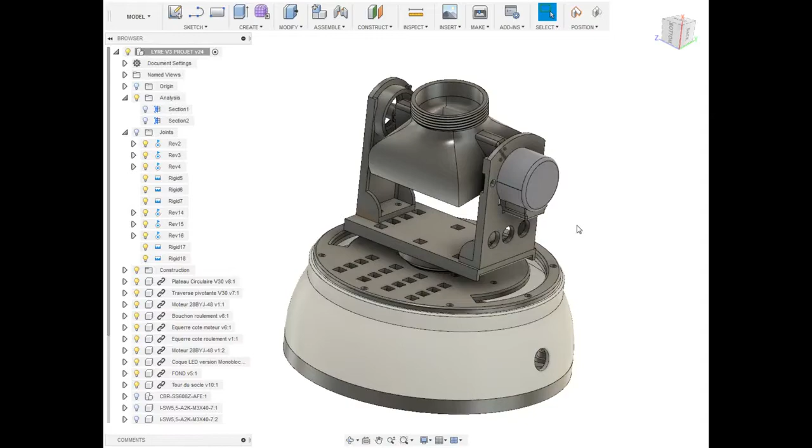I do recommend this software because it is designed by Autodesk and they distribute a personal license. They call this license the startup license. So that's a good thing because it's legal and free.

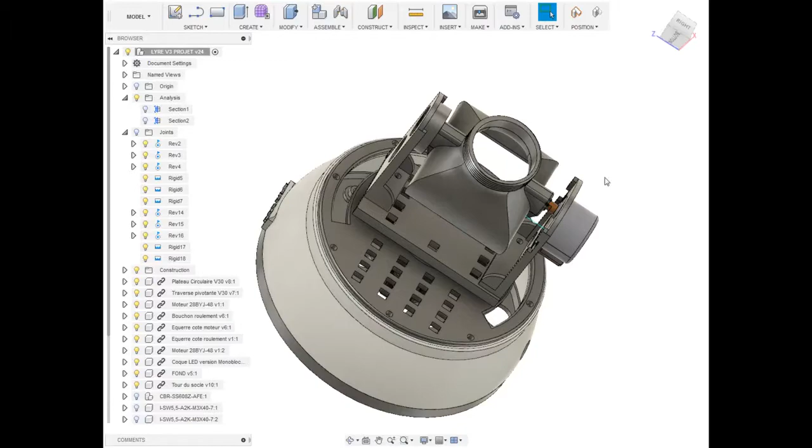That being said, here's an overview of the moving head. At the moment you cannot see the electronic parts inside. Electronic parts are not shown at the moment, neither the LED nor the heatsink. I'm currently working on an upgraded version. So in this video I'm gonna explain how it was designed and how it works.

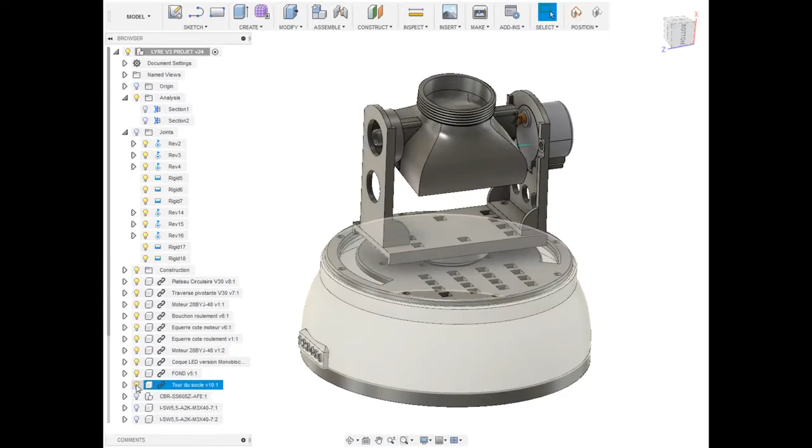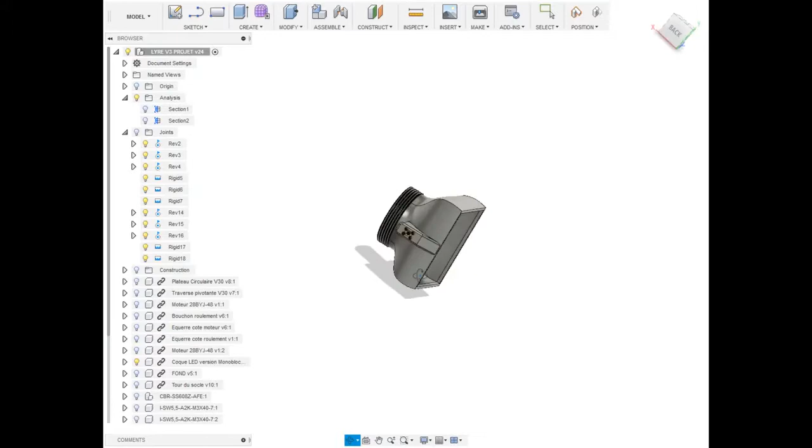So at first we're gonna start with the main part, which for me is this one. This part was designed to hold the LED and the heatsink. The heatsink I've chosen is a kind of processor heatsink, so it's a square shape, and the LED will be screwed on this heatsink. The LED emits its light, which of course is going through this hole.

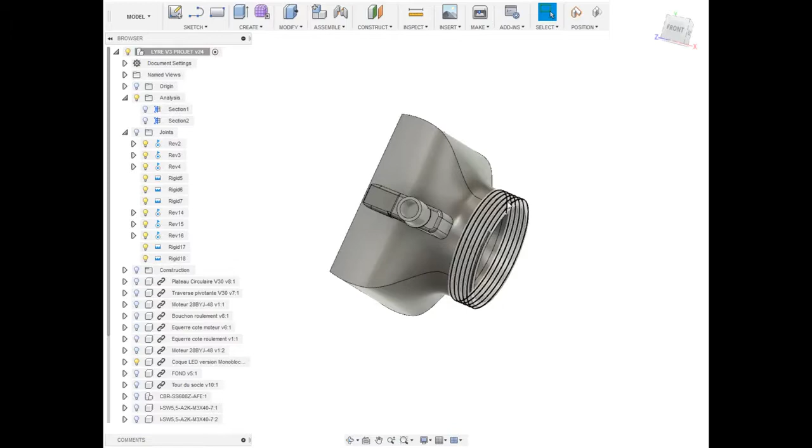And on this new revision I've added a thread here. The purpose of this thread is to allow using a lens holder, and by screwing and unscrewing, to adjust the distance between the LED and the lens. It's a very common design. This will allow adjusting the beam to make it more narrow or wider. This will also have an impact on the mix of the colors from the LED.

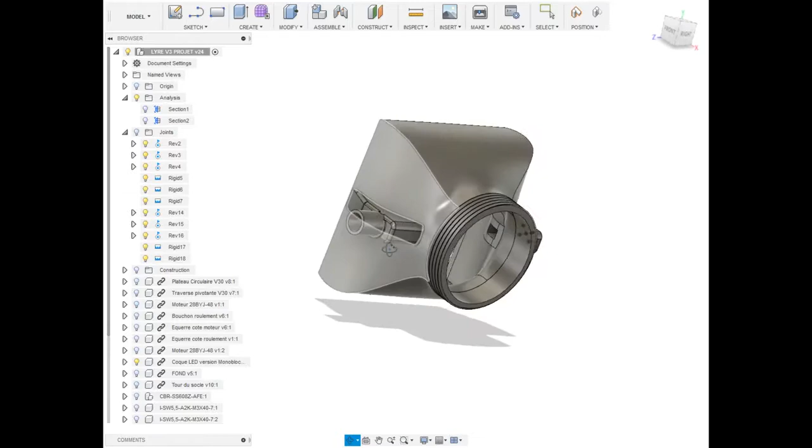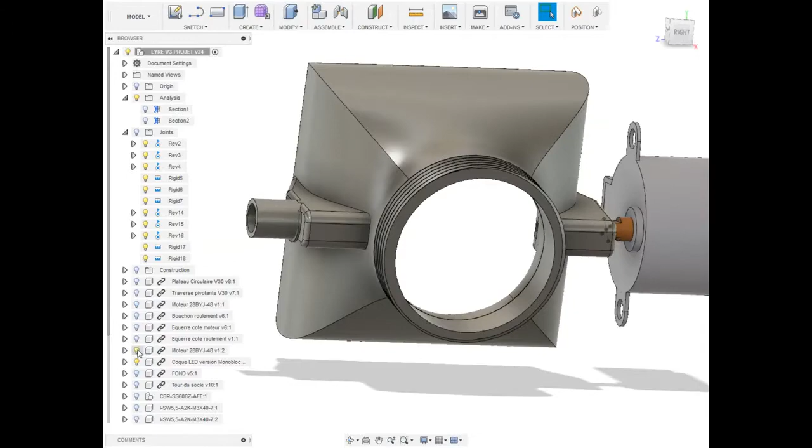On the left side you can see an axis here. On this left part you can see a cylinder shape, whose purpose is to fit inside the inner part of the bearing. This will allow creating a pivot link. And on the right side here we have a kind of rectangular shape to fit the motor axis in. So now let's talk about the motor.

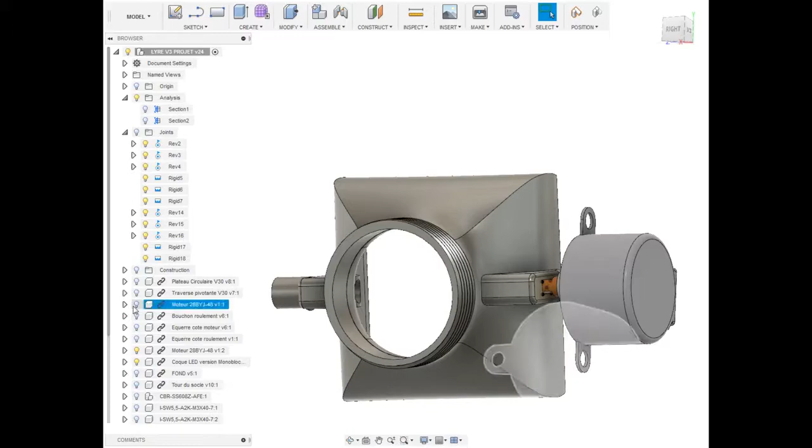The shape of the motor axis is kind of rectangular, and as you can understand, of course, the motor is used to actuate the pivot of the LED on one of the axes. So now I will show the bearing here. So now here you have a motor holder which allows attaching the motor to the chassis.

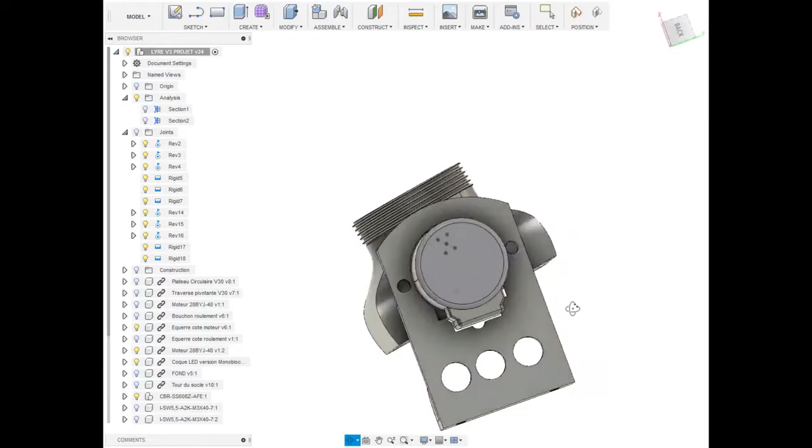And on the other side it's quite the same. This part is here to hold the bearing. The bearing is inserted by force, and that's a nice way to hold it. You don't need to glue it.

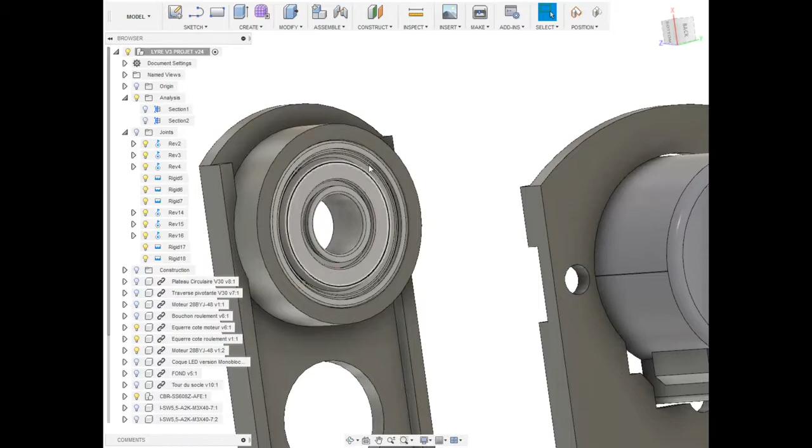So now here we have a heatsink and LED holder and everything that's required to move on one of the axes. We have this motor and this bearing, and now we're gonna place all of that on a kind of plate. But just prior to this, as you can see, there's a hole which is here to allow the wires coming from the LED to go outside of the casing.

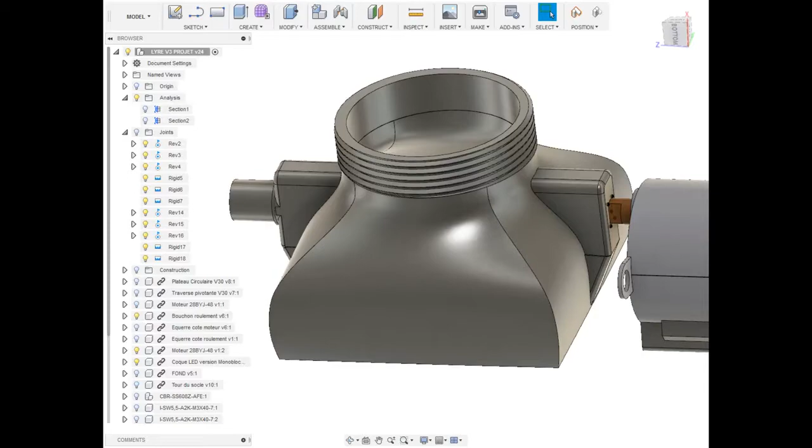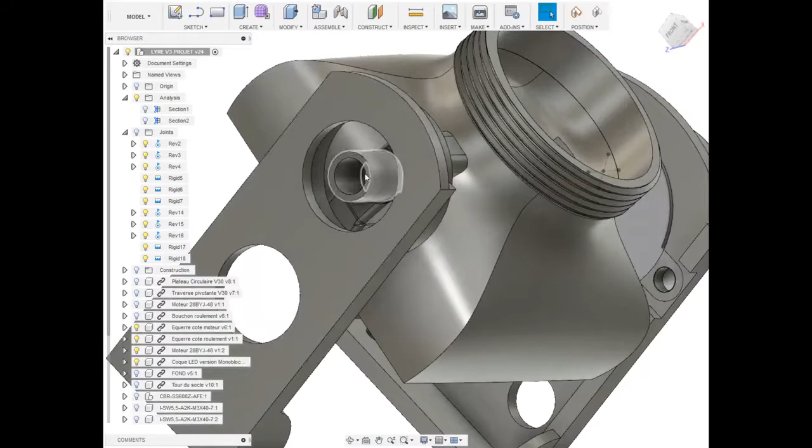The LED is RGBW, so it's a 4-color LED. So that's kind of a quadruple LED, which means we will need 8 wires from this LED to the electronics. The wires will turn as you move the LED on this axis. So of course, as you can imagine, there is no infinite rotation available on this moving head.

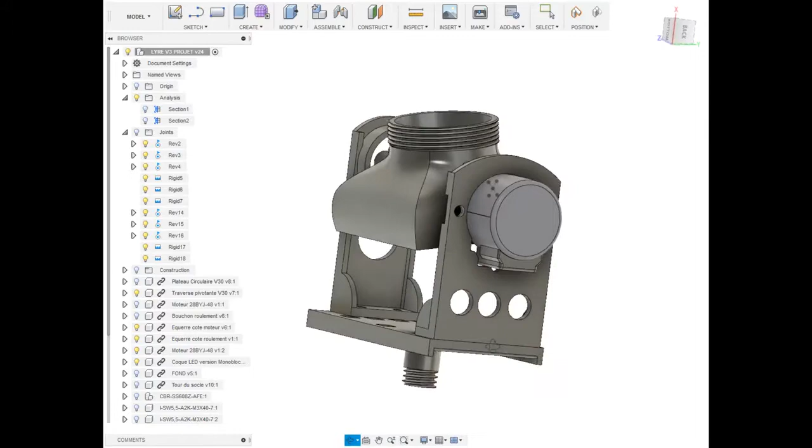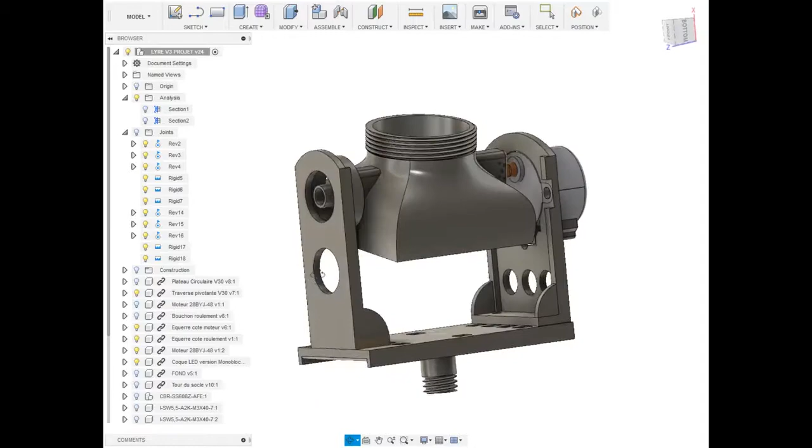So here we have an extra part to make this whole subset rigid. And as you can see, this extra part has an axis to allow rotation on the second axis of the moving head. This one is called the pan axis. The first one we've seen is the tilt axis. So the purpose of this part is to have a rotation like this.

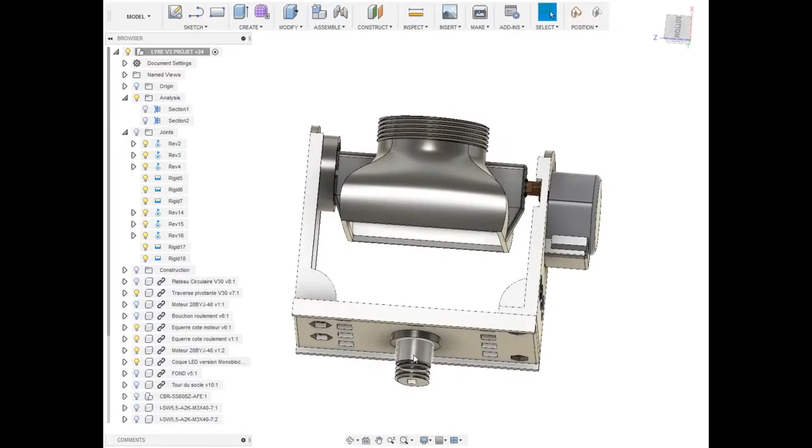We're going to use the same principle for the rotation as for the first one. We're going to use a bearing. Still the same, this part will fit in the inner ring of the bearing and ensure a proper rotation. I will hide a few parts so that we can see it better. This bearing will be located here, and as you can observe, there is a thread.

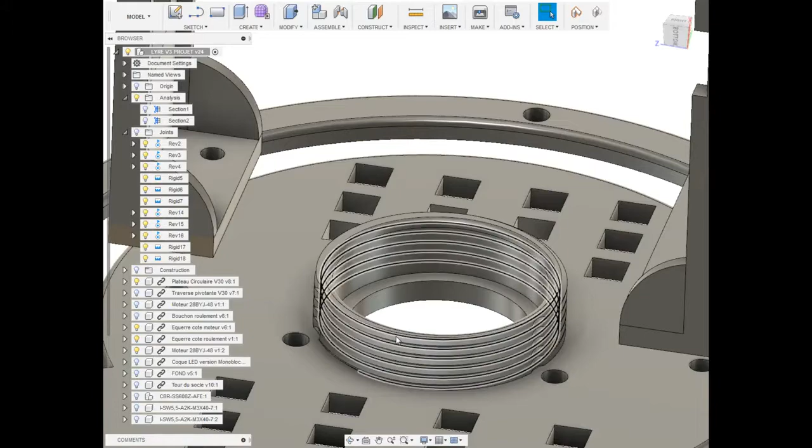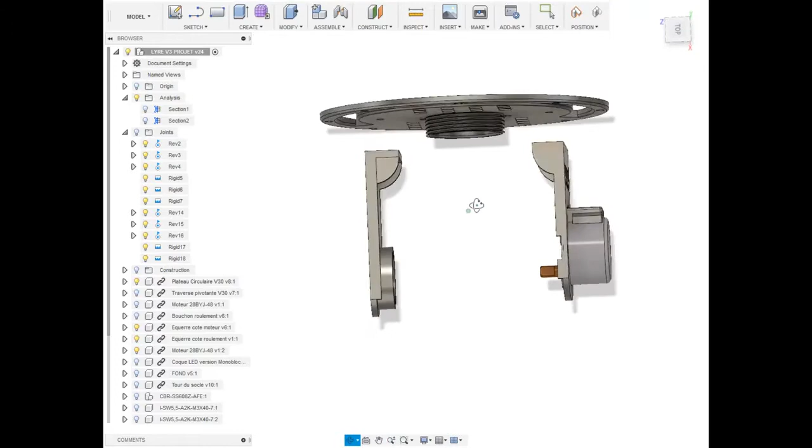This thread will be used to receive a kind of cap which will hold the bearing in place. And this way, even if you use the moving head upside down, this bearing will ensure that the first axis will not fall to the floor. So it's quite important, because I like when moving heads are oriented upside down like this. I prefer this orientation. So as you understand, this is where this thread is very important.

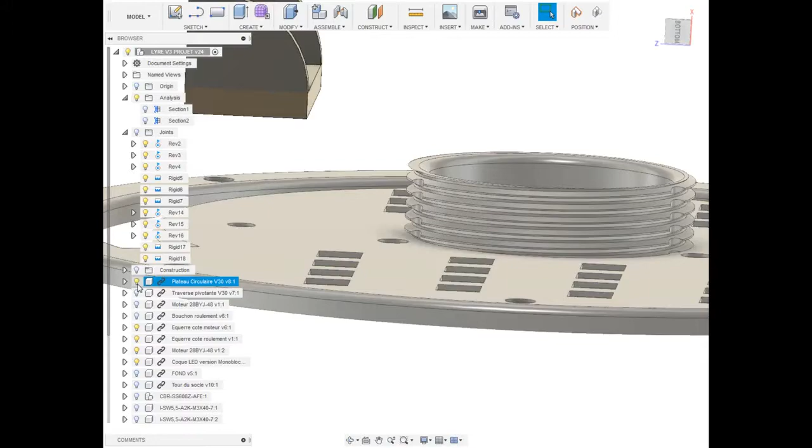So now let's put the parts back in place here. The bearing will be located exactly here. And here, oh magic, you can see another thread. And oh, I just realized that I didn't show you the first cap for the second bearing. And here it is.

So now let's get back to this small thread, and here we can use a nut to hold the first subset in place with respect to the bearing. So now the second bearing is held in place and the first subset is also held in place.

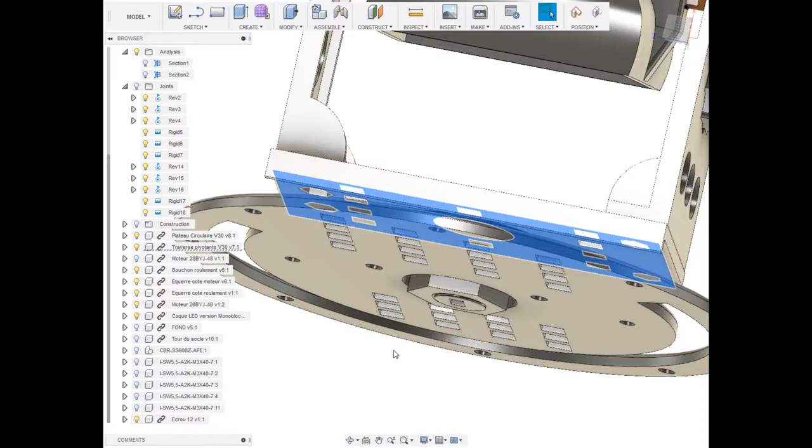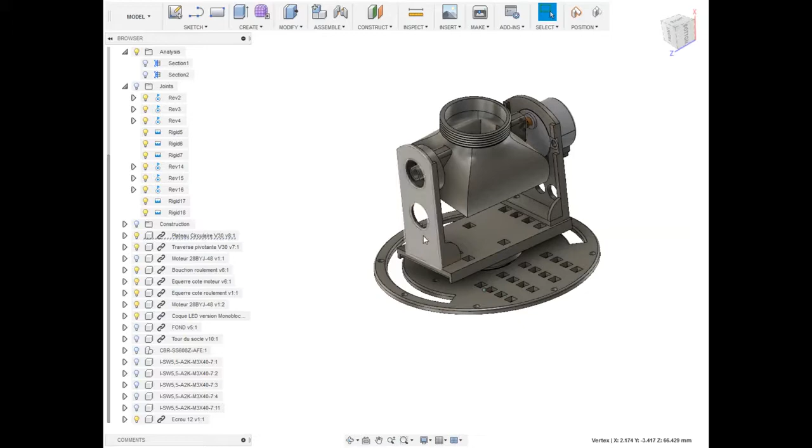Now let's talk about the plate. On the plate, as you can see, we have a kind of path here. This path has been cut, or not really cut because it's printed, but it is removed from this plate. The wires coming from the LED will move along this path as the moving head is rotating. And this way they can reach the inside of the moving head and reach, of course, the electronic boards.

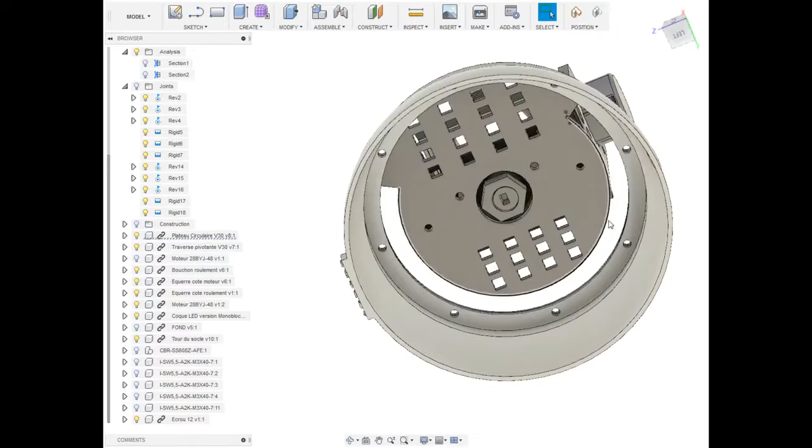So the main body is placed just below this plate. And here you can see a hole to put the DC connector.

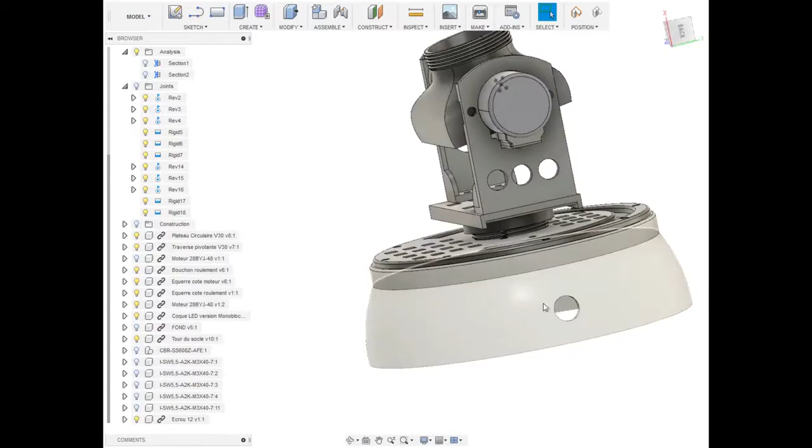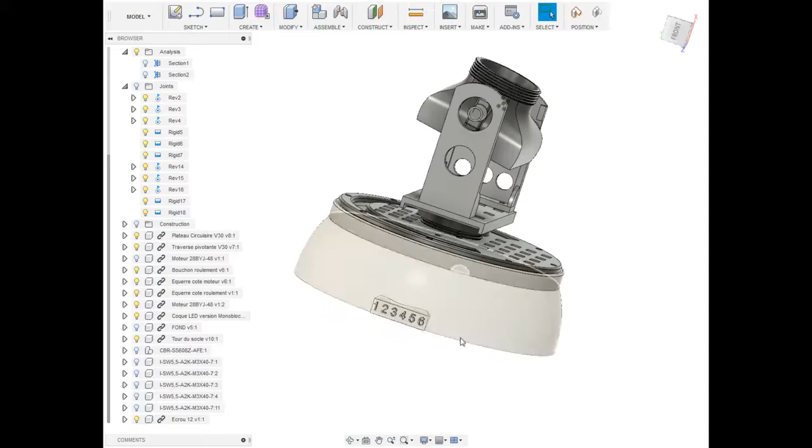And here we have a few digits. This allows you to use a pen and write on one of the numbers to set a number to the moving head. For instance, if this one is number 3, then you can use the pen to color number 3. This will make it very visible that this moving head has this number. This will be used later for the DMX configuration.

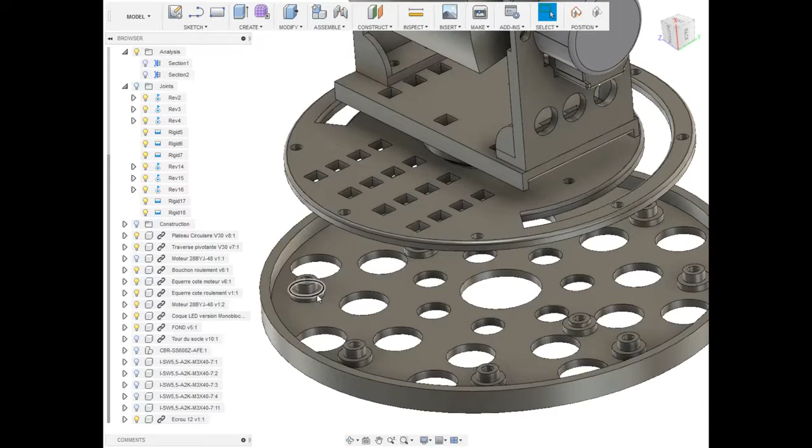And then to close all that, we will use the bottom cover. As you can see on this bottom cover, there are some spacers which are integrated into this part. And on top of these spacers, we will place metallic spacers to hold the plate on top of it.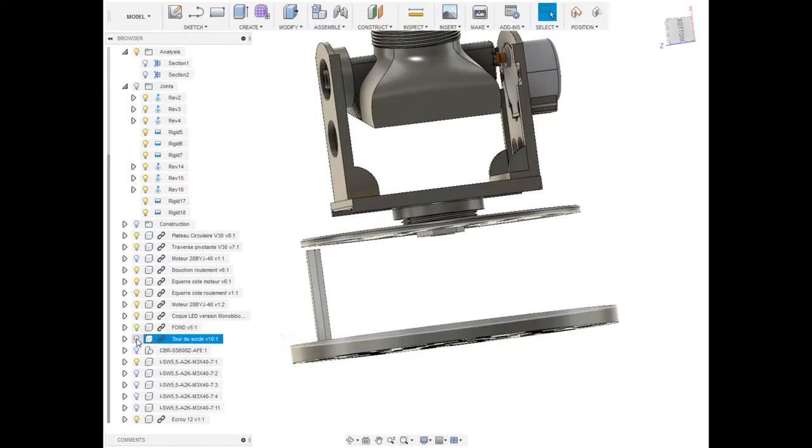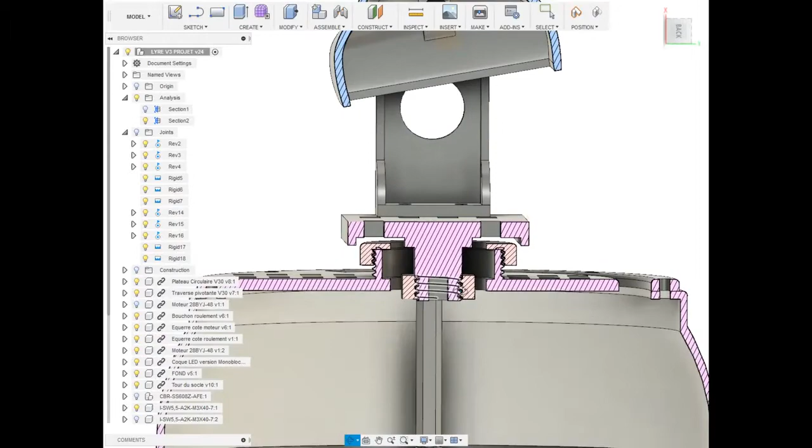So now if I put the main body back in place, okay, that's not very visible, so we'll try to use the section view to see it better. Okay, it's probably much clearer this way. That's a beautiful section view where you can see the whole design. Here you can see again the bearing held in place by the cap and by the plate, and the subset held in place by the nuts that you can see here.

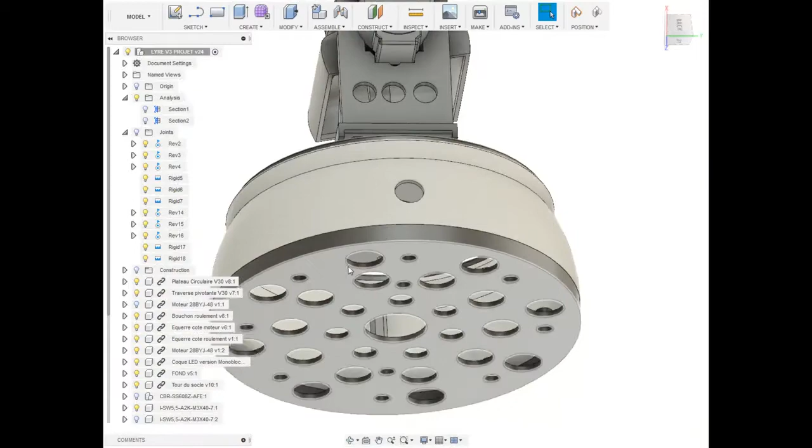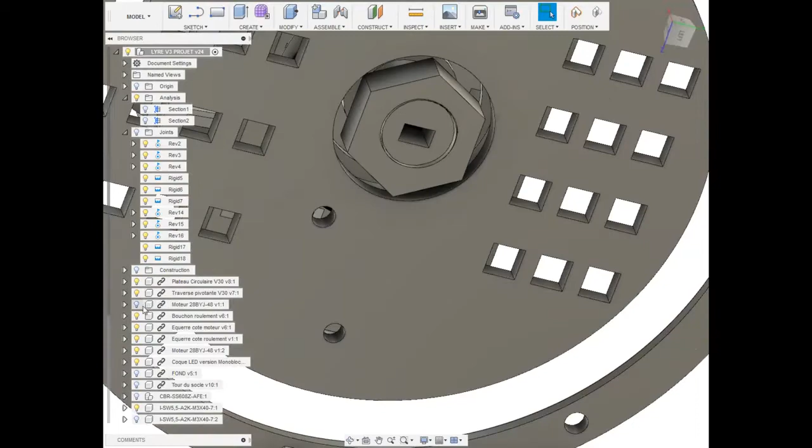Now, what else can I say? Oh yes, of course, that's important. We have two motors, one for each axis. On this axis you will see something that looks very familiar: a rectangular hole, as we've done for the first axis. So we'll use the exact same motor as for the first axis. That's the motor for the pan axis. We will hold it by a kind of spacer that I will do later. This will ensure that we have the correct spacing between the plate and the motor.

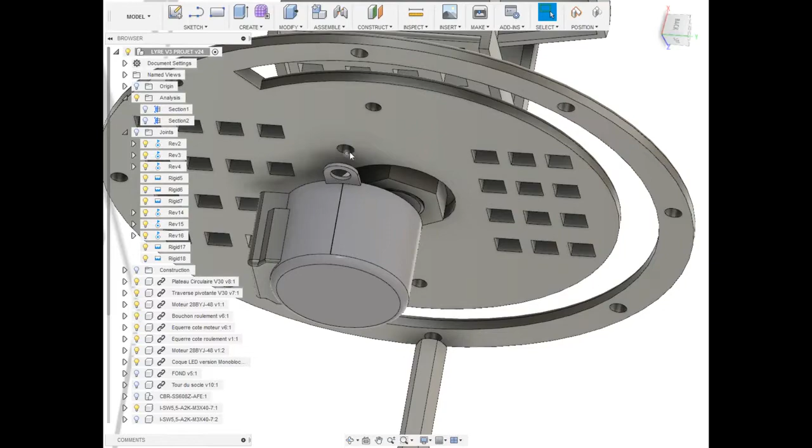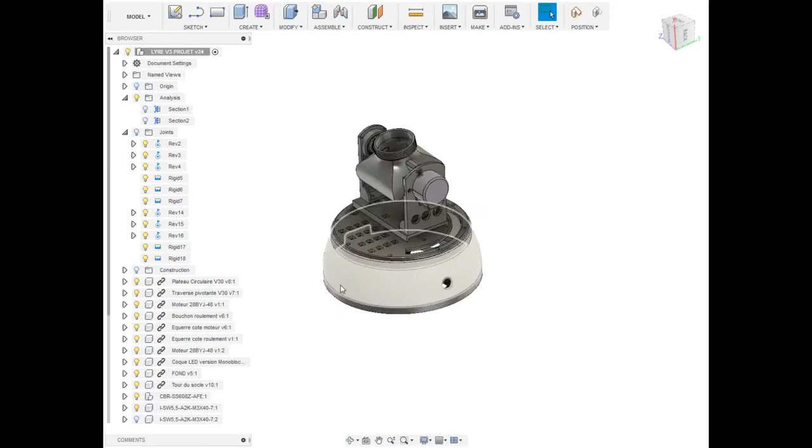So now I think you've seen most of it. I've detailed the two axes and the motors. Maybe we can discuss a little bit about the motors. Why did I choose these motors? First, because they're very cheap. You can find them on many cheap suppliers. They are simply the cheapest stepper motor I've found, probably €1 or €2 each. They are manufactured for a lot of consumer appliances. If I'm right, but I'm not sure, I think I've seen them in some air conditioning systems and probably some webcams.

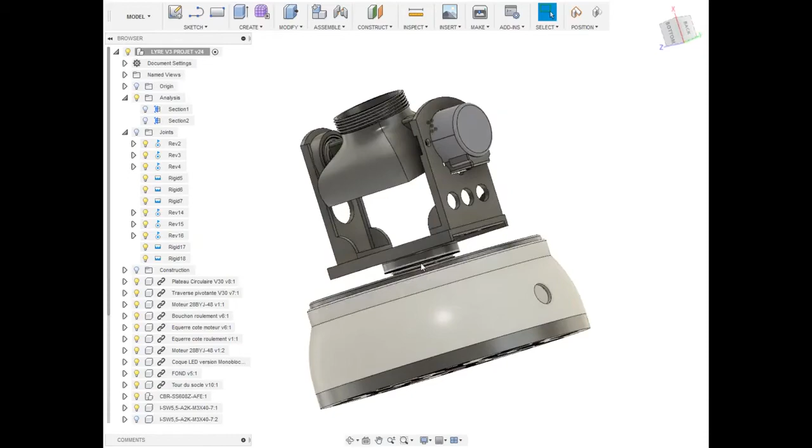If you do not use this particular motor, the other motors are much more expensive. I think they start from €4 to €5 per unit, so that's a big step. Of course it's a question of compromise, because with a bigger stepper motor you can move the moving head faster, but that will be more expensive. With this smaller motor we will have some speed limitation, but I found it quite acceptable.

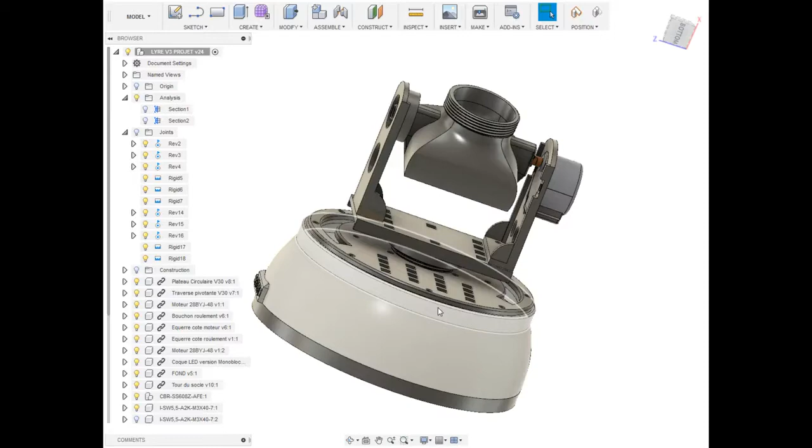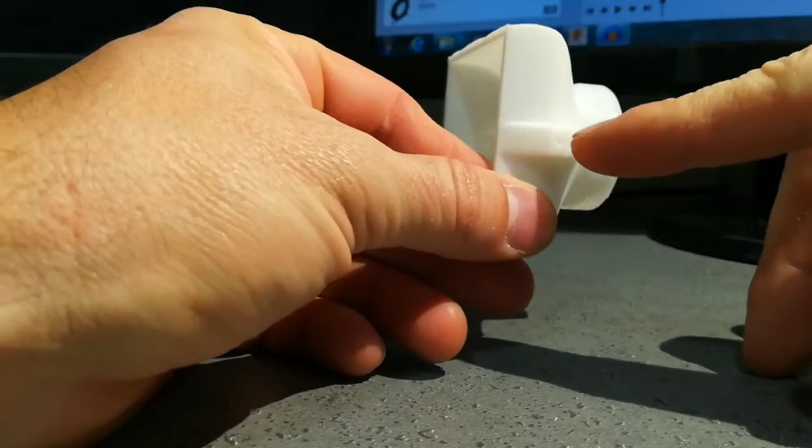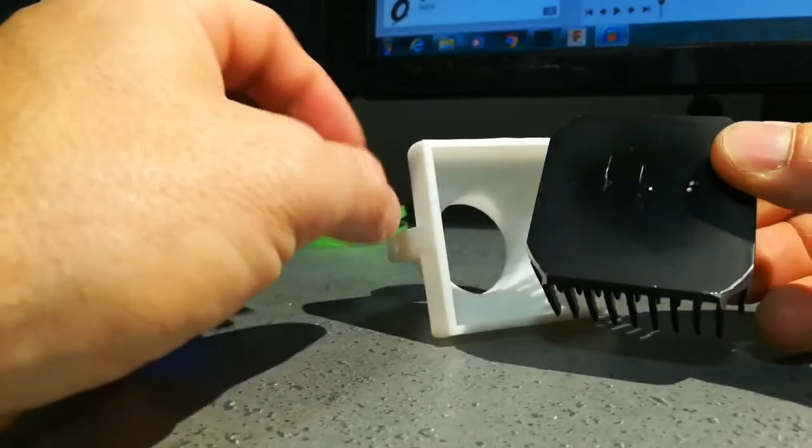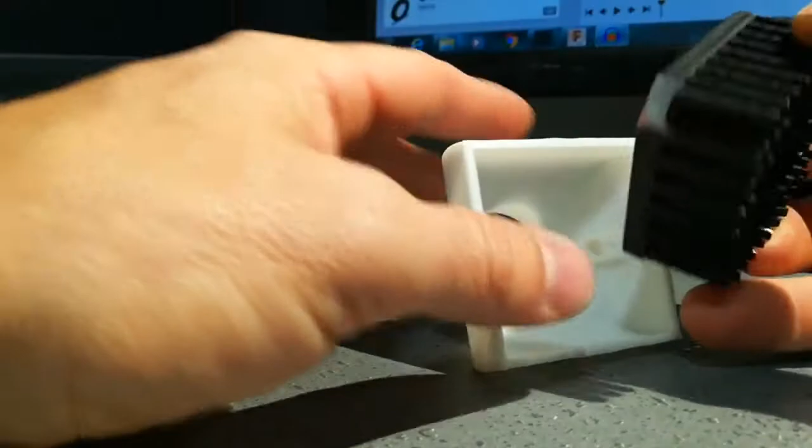So now let's look at the real 3D printed parts. Here's the LED and heatsink holder. Here you can see the rectangular holes to place the motor axis. On the other side you will find the axis for the bearing. Here's the thread for the lens holder. On the back we can insert the heatsink. So here it is. It's quite a big heatsink, but we need that because the LED is quite powerful. I had this heatsink in stock for many years, and I've designed the moving head around it.

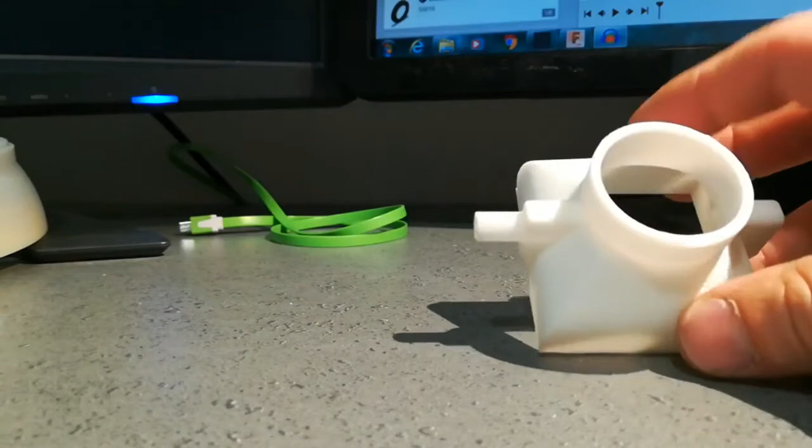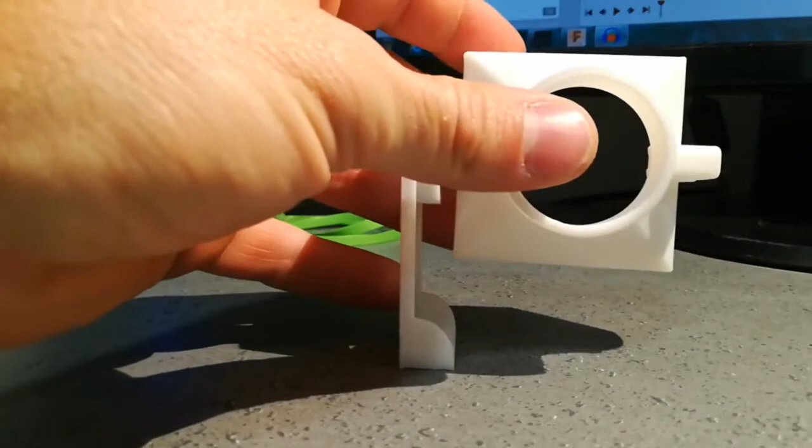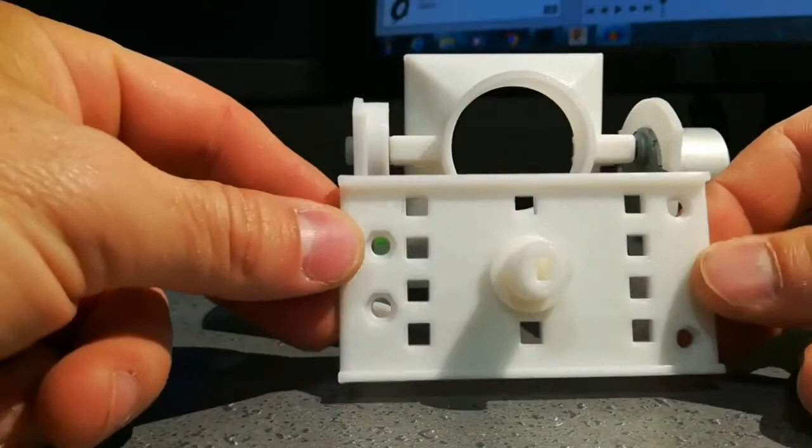So here is how you assemble. Inside here you will find the LED. Here's the part holding the bearing, and you can insert it this way. On the other side is the motor holder. Once you've assembled all of that, you can see that it's moving on one of the axes like this. Then we use this extra part and place it like this. And here we have a beautiful subset that can rotate on one of the axes. Then we will place all of that on this plate that I will show.

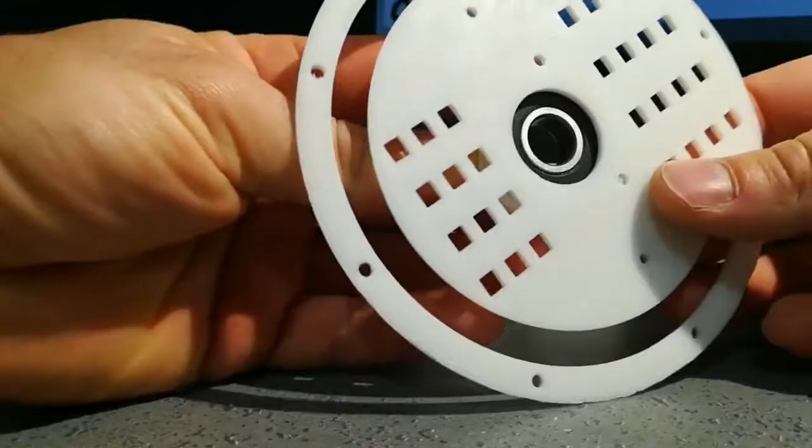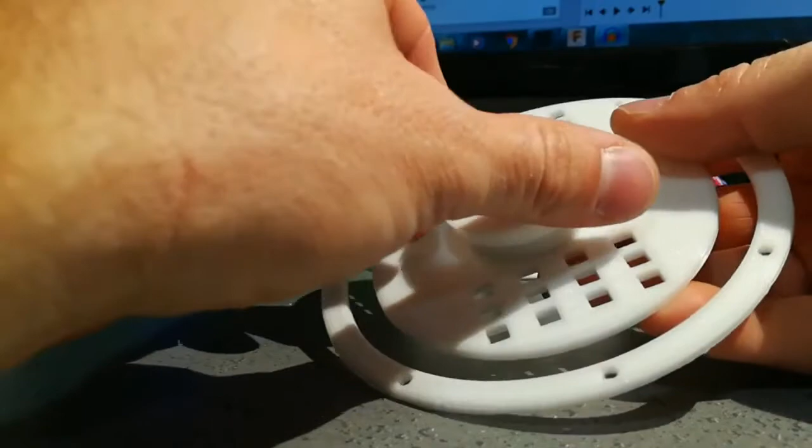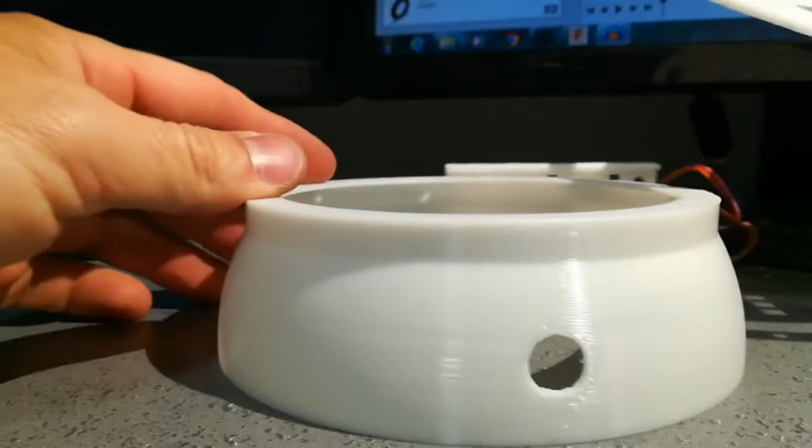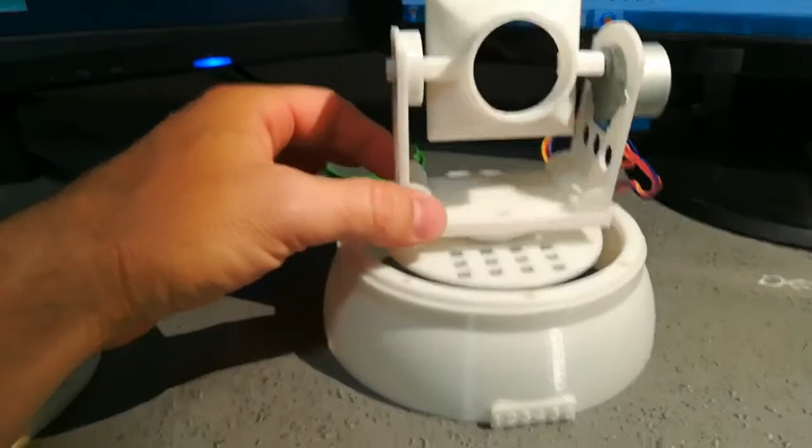Here inside you can see the second bearing. It's not specially placed by force; it's mostly held by the cap. Now I put this plate on the main body, and if I place the other part on top of it, here it is. No magic here, you have the second axis working. I cannot add the bottom cover because I do not have enough nuts. So I think we're done with this first mechanical presentation of the mini, very economical moving head.